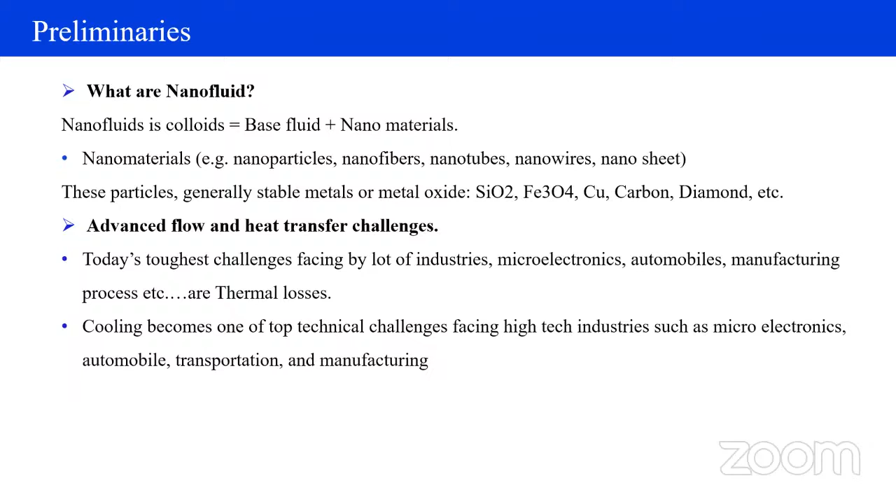I write some here: applications of nanoparticles or nanofluids. We can use nanofluids in engineering, engine cooling, nuclear cooling systems, cooling of electronic circuits, refrigerators, enhancement of heat transfer exchange, biomedical applications, cooling of microchips, petroleum industry, surface coating, fuel additives, and lubricants.

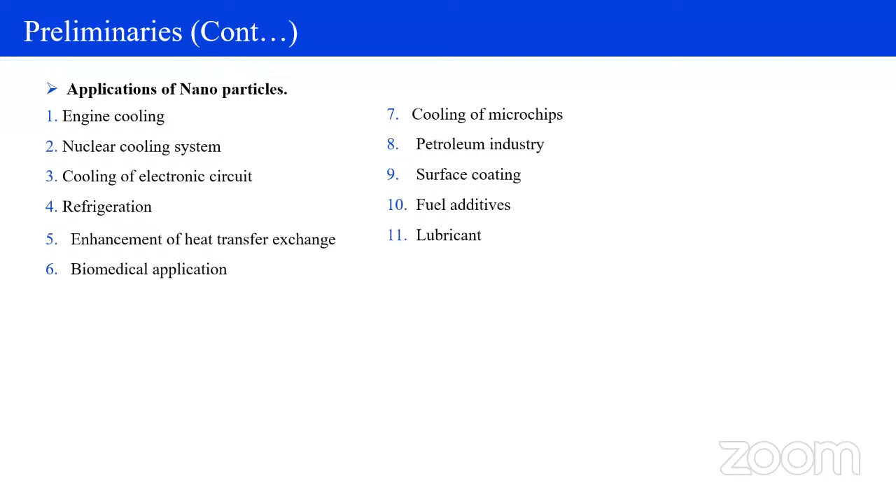Heat transfer to fluid at supercritical pressure. In 1946, Schmidt investigated the heat transfer characteristics of supercritical fluids and observed that the heat transfer coefficient of fluid in this regime showed greater superiority than that at conventional subcritical pressures. After Schmidt, many other researchers studied these ideas and found them very helpful in different types of industry. So extensive research activities were carried out to explore heat transfer characteristics of supercritical fluids for the purpose of developing supercritical pressure fossil-fired power plants with improved thermal efficiency.

If we increase the base fluid's thermal conductivity, the improved thermal conductivity is very fruitful in thermal power plants, because it is very useful for coolant. In recent years, there has been renewed interest in this field mainly because of new applications of supercritical fluids, especially in the nuclear industry. Many countries are trying to produce electricity with the help of nuclear reactions. In nuclear reactions a lot of heat is produced, so we need to reduce the temperature inside the nuclear reactors. That's why we use fluids whose thermal conductivity is more efficient compared to traditional fluids, and supercritical fluid is very helpful in nuclear industries.

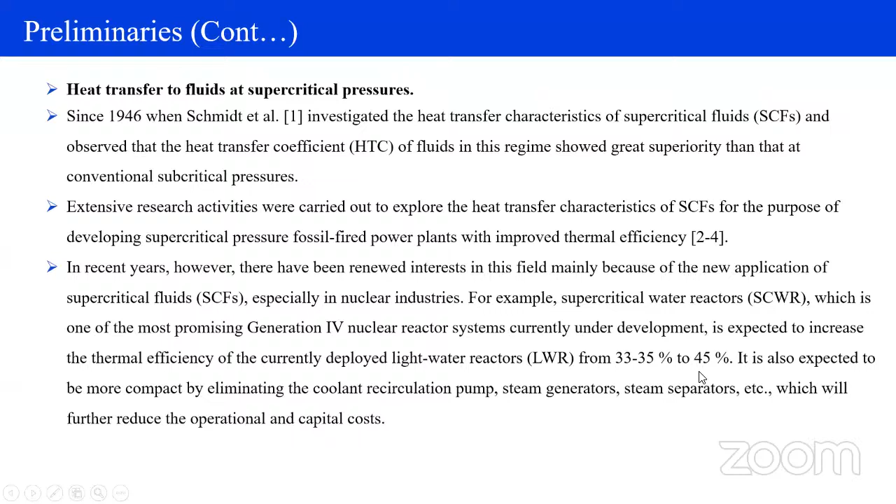And in 1861, Maxwell first gave the idea of micro-size particles. He concluded that if we include micro-size particles in the base fluids, then the thermal conductivity of the base fluid is increased. But there are a lot of problems, because Maxwell used micrometer-size particles in base fluids, and the size of the particles is high as compared to nano-size particles.

That's why sedimentation occurs, and real application is difficult in industry, because the particles sediment at the surface, so they can't stay stable inside the fluids. Being unstable in base fluids, they are not useful in practical applications.

After Maxwell, in 1995, Choi gave the idea that if we reduce the size of particles from micrometer to nano size, then these particles are more stable as compared to micrometer-size particles, and we can use them for different purposes. That's why after Choi's idea, the new technology was introduced in the market.

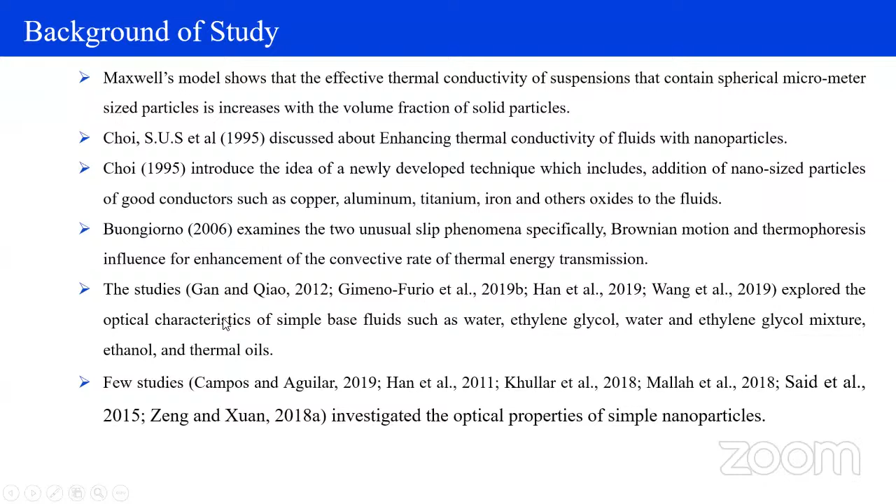Motivations. Motivated by the wide range of applications, the quest for improved thermal performance is on the rise because of sophistication in technological processes. The use of the nanofluid model has provided ample capacity to meet the rising requirements in this research area. It is also worth noting that the occurrence of heat transfer deterioration, a sudden rise in wall temperature, may raise a safety concern, as it could potentially damage the tube wall. The motivation for this investigation comes from the current lack of work on the mitigation of heat transfer deterioration.

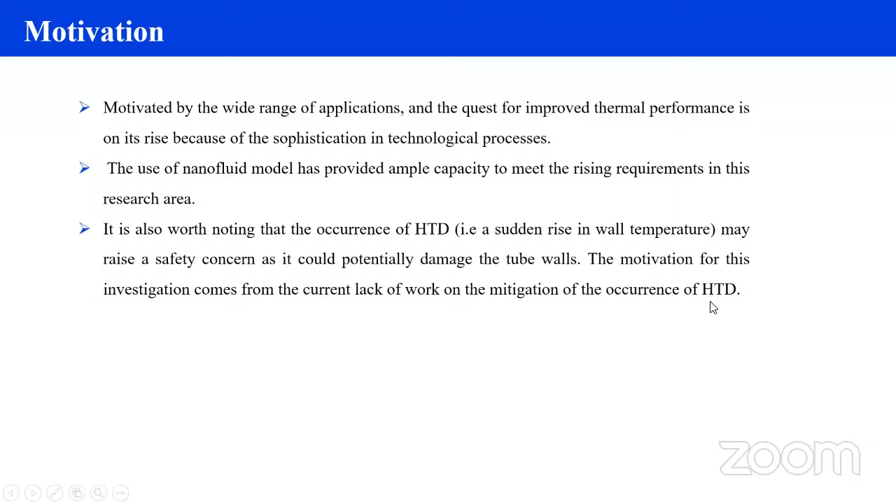Research objective: obtain a higher rate of heat transfer. Actually, our primary objective is to increase the thermal conductivity of base fluids. That's why we want to include nano-sized particles inside the base fluid, so that we can observe that the thermal conductivity of the base fluid will be increased. If the thermal conductivity of the base fluid is increased, then it is very useful in industries. If it does not increase, it is not useful in industry. That's why our main objective is to enhance the heat transfer rate inside the base fluids.

Develop a model to predict the mechanism of occurrence of heat transfer deterioration in supercritical fluids flowing vertically in a macrochannel using water as the working fluid. Many other researchers use different base fluids like carbon dioxide, but we can also use water as a base fluid.

Develop a model to predict the mechanism of HTD in supercritical water flowing upward in wavy mini channels. Many researchers use smooth channels, but we want to use wavy channels because the results are more useful, since the temperatures inside the nuclear reactor decrease in a wavy channel as compared to a smooth channel. Obtain the optimal configuration, size, position, number, density, and arrangement of obstacles which can have the most significant effect on HTD mitigation.

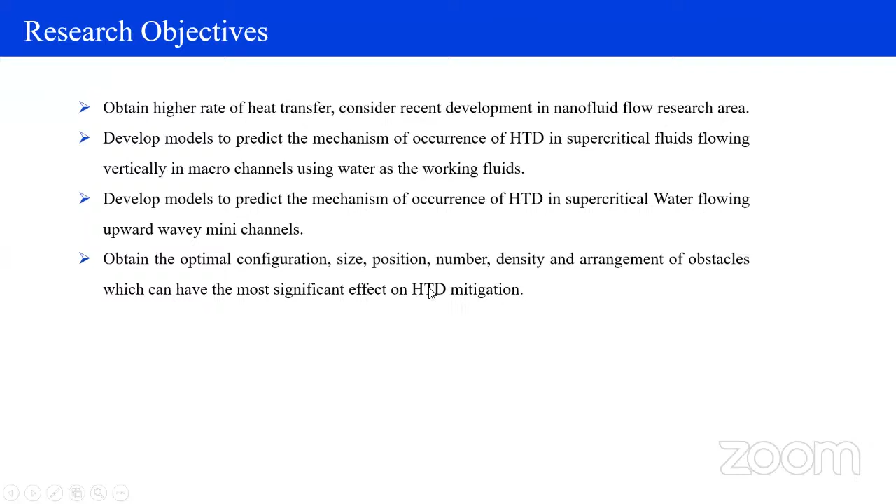Methodology: a simple 2D sketch or drawing when simulating a 2D axisymmetric problem. Actually, we are using ANSYS for simulations. The constructed geometries are then meshed to create control volumes. First, we sketch axisymmetric problems in 2D form, and after that we transform this sketch into a mesh.

When all the information required for simulation has been specified, the simulation is started so that the Fluent software performs iterative calculations until a converged solution to the numerical equations representing the flow is reached. After the solution is converged, the results are examined to check that the solution is satisfactory and to determine the required flow data. If our results are satisfactory, then we draw all the results in tabular or graphical form. If results are not satisfactory, then we check our problem again.

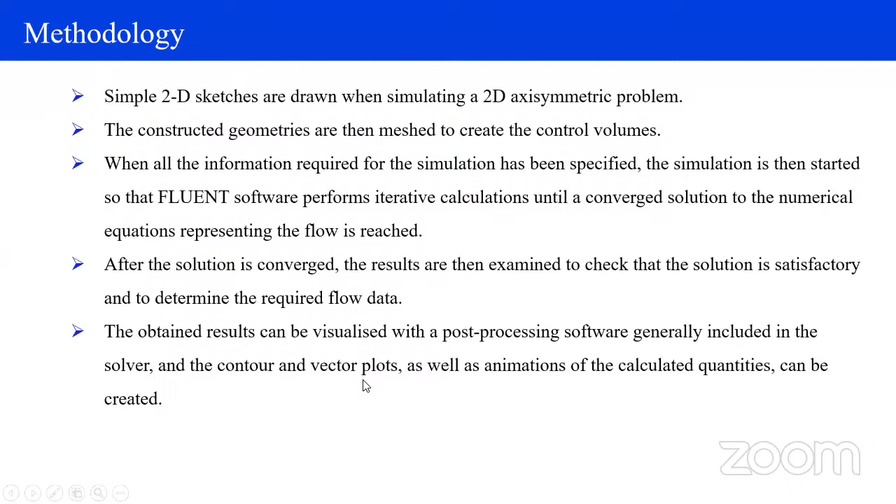The obtained results can be visualized with post-processing software, generally included in the solver, and contour and vector plots, as well as animations of the calculated quantities, can be created.

Sir, voice is not audible, sir. Madam, it is coming. Hello. Sir, yes, sir, now you can carry on, sir. Okay.

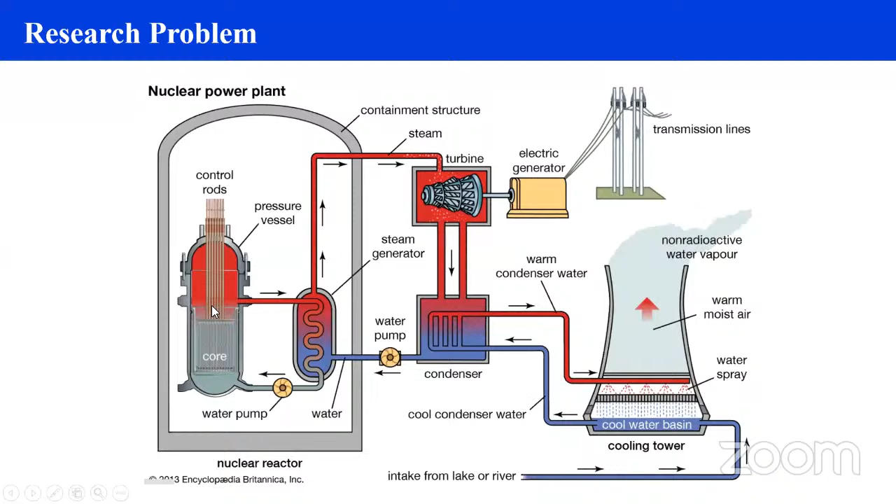Here is actually the 2011 Fukushima accident, which drew the attention of many researchers to overcome the challenge of high temperature inside the nuclear reactors. So there are many precautions which are useful to avoid the accident.

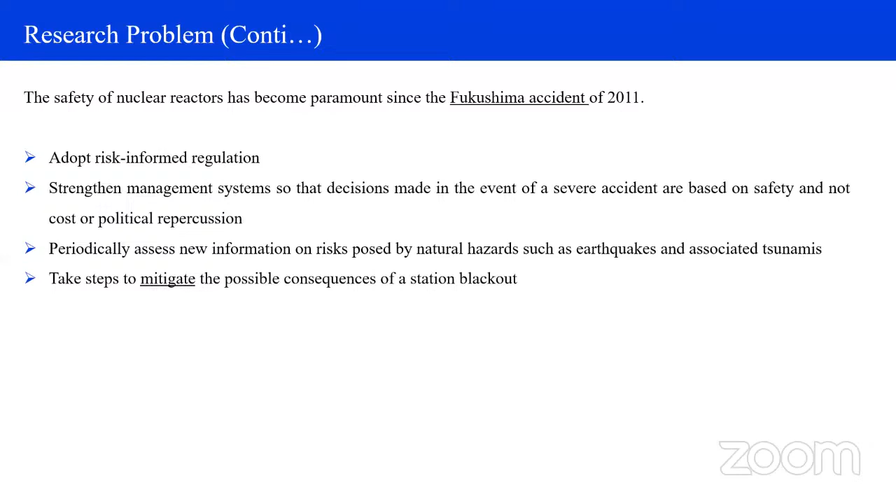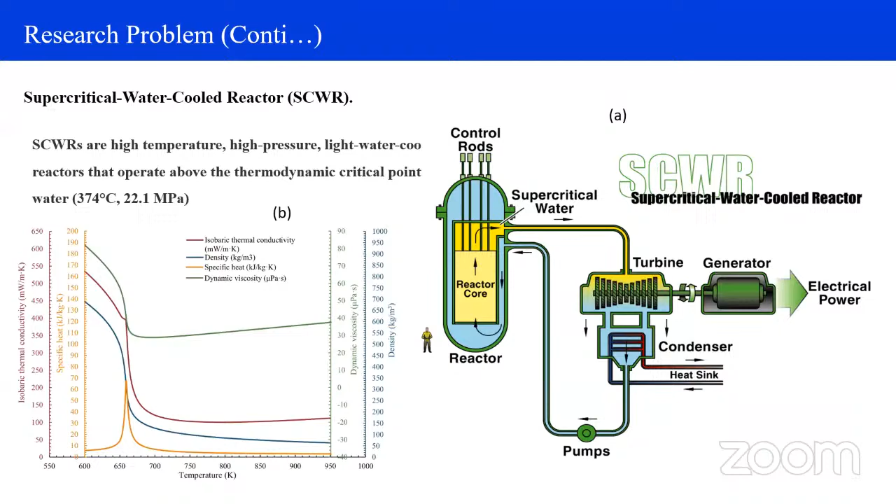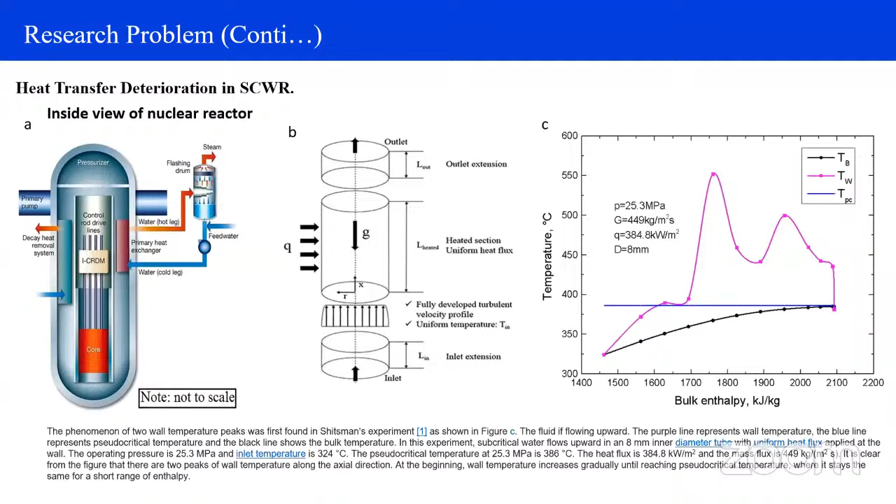Mitigation of heat transfer deterioration. Actually, the first peak and second peak. If this peak increases, then deterioration increases because of the sudden change in wall temperature. If wall temperature increases, there is a chance of leakage of the nuclear reactor or a blast. So our main task is to reduce deterioration. As we can see here, the peak is high compared to the second line. The second line is lower compared to this line.

So if we decrease the peak, it's called mitigation. And our main objective is to reduce the deterioration inside the nuclear reactor. We use different concentrations of nanoparticles. First we try 0% nanoparticle, we draw a result without nanoparticles. And then we include 0.3% concentration of nanoparticle inside our base fluid. Then 0.6%, 0.9%, 1.2% and 1.5%. And we observe different outcomes in temperature profiles.

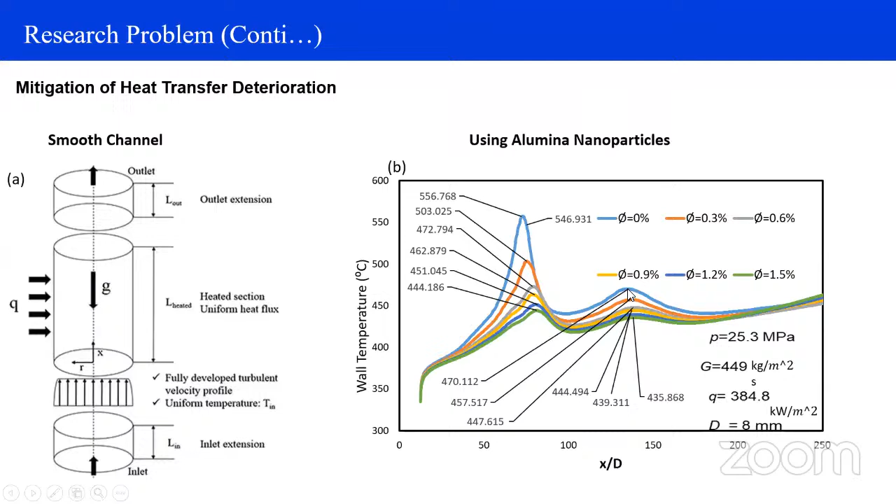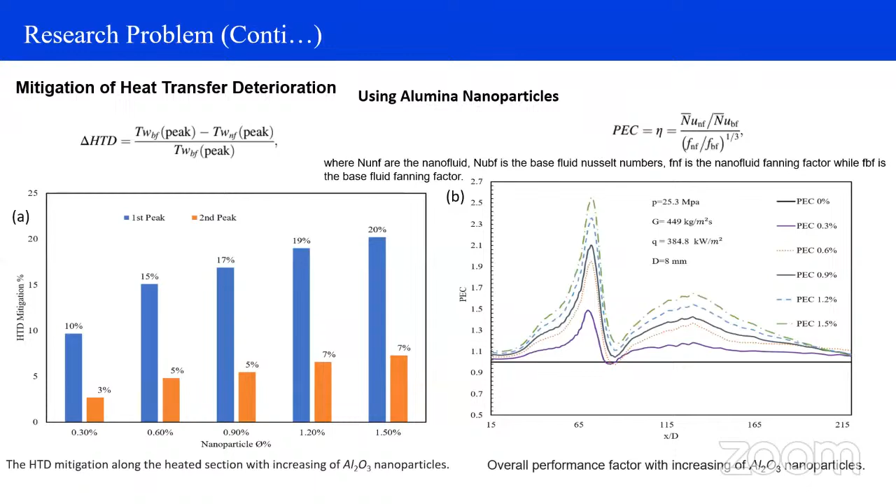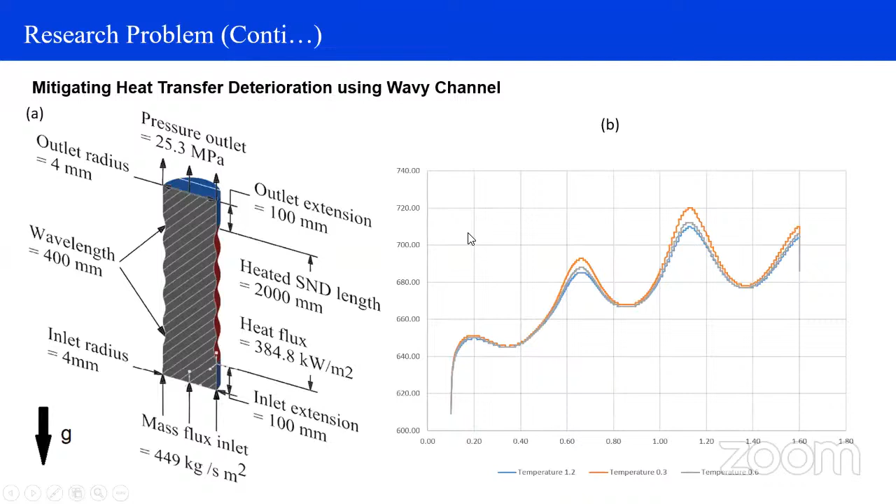And figure B shows the outcomes of wavy channels. If we study the same problem for smooth geometry, our results are more efficient as compared to smooth geometry. So the wavy channel is also helpful to reduce the temperature inside nuclear reactors.